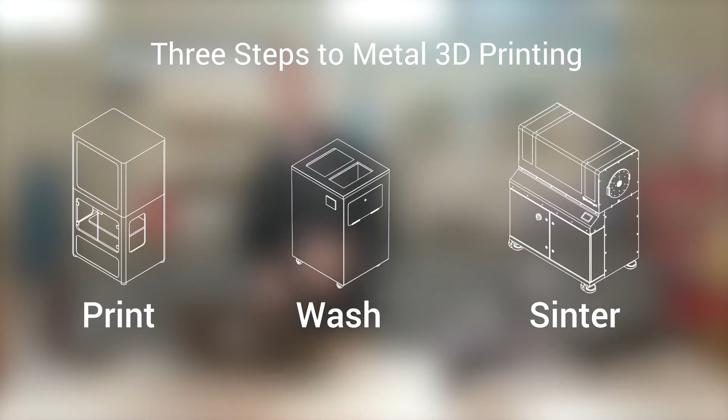First, let's start with CAD. You design your part, then export to STL and upload into Eiger. Eiger is a cloud-based slicing and print management system that comes with every Markforged product. This automatically configures your part based on the material and printer you've selected.

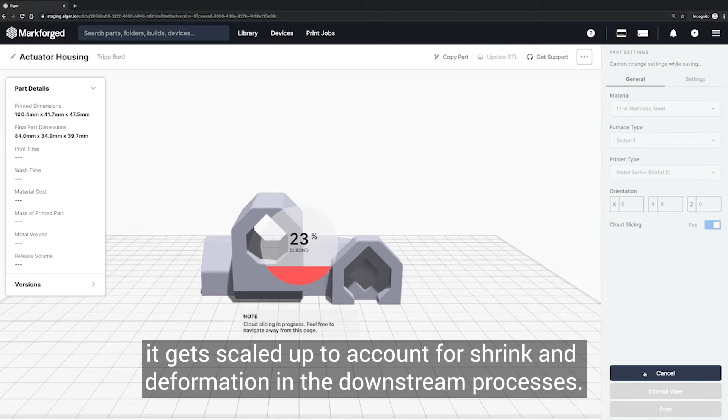When your part slices for metal 3D printing, it gets scaled up to account for shrink and deformation in the downstream processes. It then slices your part into discrete layers, identifies overhang features, and builds supports and a raft underneath your part. As we go through printing, washing, and sintering, Eiger will monitor the part's progress along the way. Let's start this print and go to the Metal X.

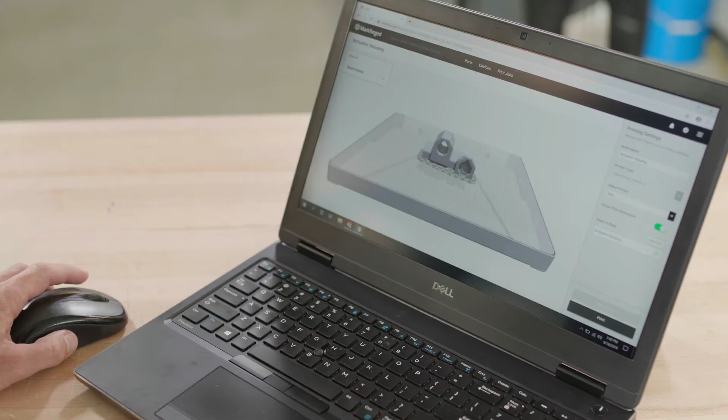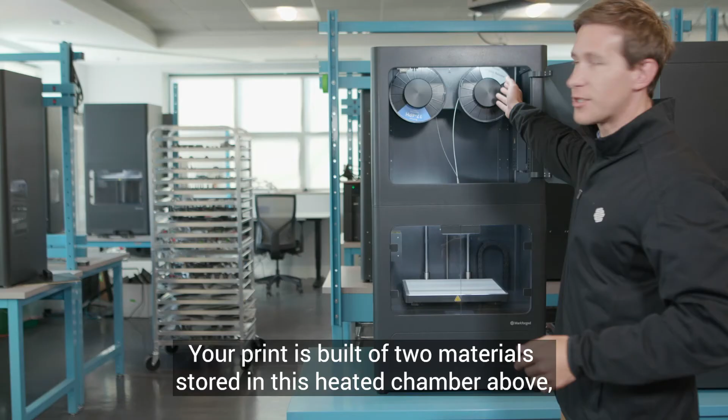Before starting a print, the machine automatically maps and levels the bed to ensure the first layer goes down well. Your print is built of 2 materials stored in this heated chamber above, one of ceramic release material and one of the metal to be printed. This filament material is metal powder safely suspended within a 2-part plastic binder. It gets heated and extruded onto the build plate where the part is created layer by layer.

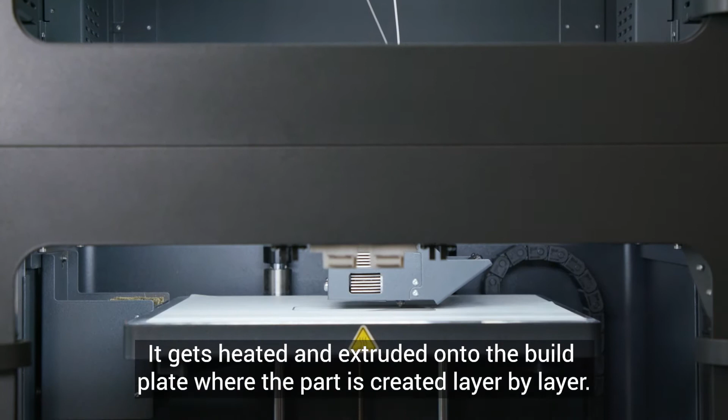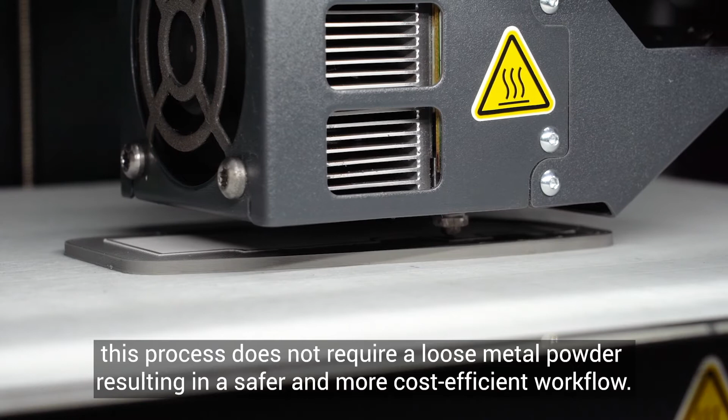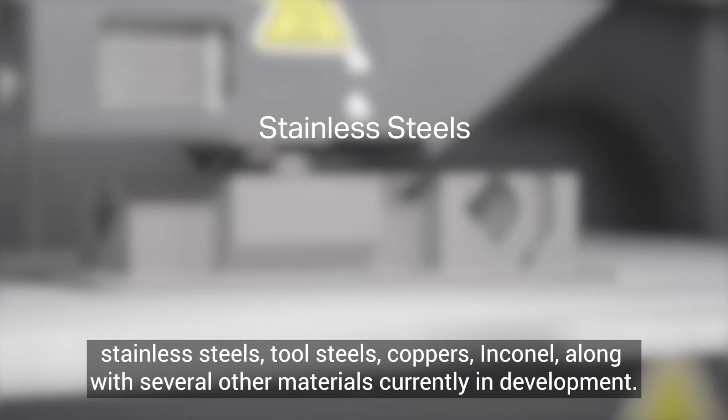The release material gets extruded as an interface between the part and its supports, so that once your part comes out of the furnace, it's easy to remove. Unlike other metal 3D printing systems, this process does not require loose metal powder, resulting in a safer and more cost-efficient workflow. 17-4 stainless steel is loaded now. However, with a quick changeover, the system is capable of printing in stainless steels, tool steels, coppers, Inconel, along with several other materials currently in development.

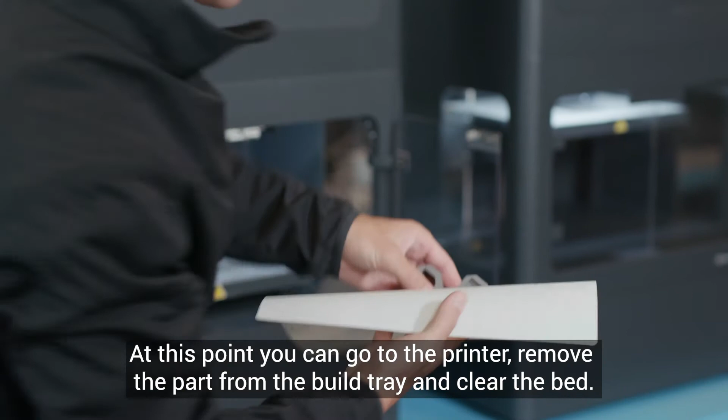Once your part is finished printing, you'll get a notification. At this point, you can go to the printer, remove the part from the build tray, and clear the bed. Now we have what's called a green part. It doesn't really look or feel like metal. However, a large part of it is comprised of metal powder. Next step will be putting it into Wash-1 for the debind process.

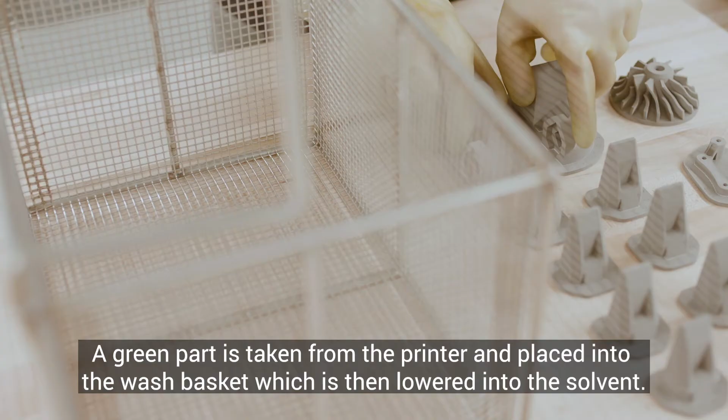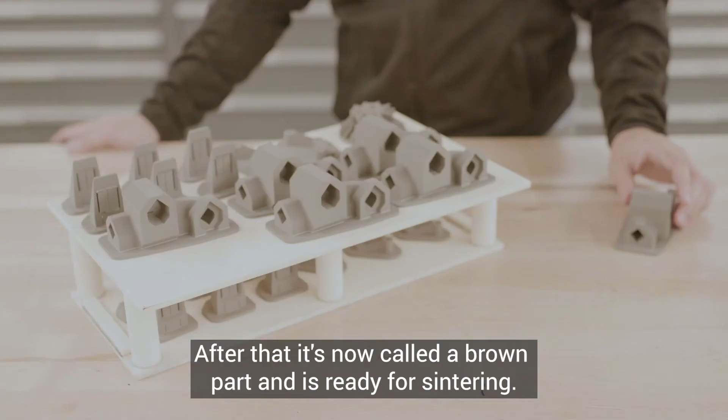The Wash-1 removes the first stage of the binding material. A green part is taken from the printer and placed into the wash basket, which is then lowered into the solvent. Wash times will vary, ranging from a few hours to a few days, depending on the thickest region of your part. After that, it's now called a brown part and is ready for sintering. Let's go over to the furnaces.

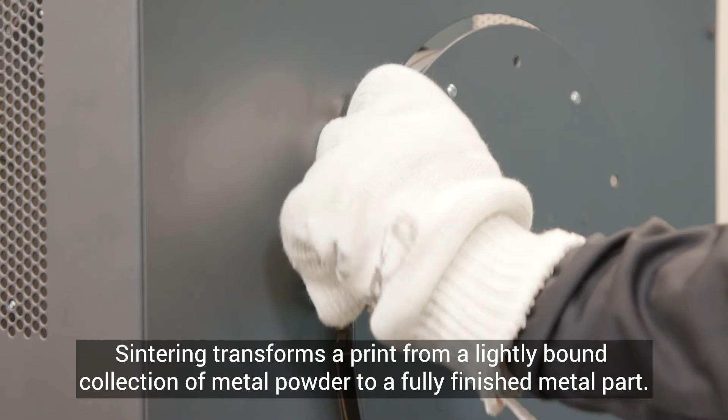This is Sinter-2, a furnace designed for mid-volume production runs and larger printed parts. Sintering transforms a print from a lightly bound collection of metal powder to a fully finished metal part. First, the temperature ramps slowly to burn away the trace amounts of remaining binding material. Then, temperature ramps closer to the melting point of the material, allowing metal particles to start to fuse together to create a strong metal part.

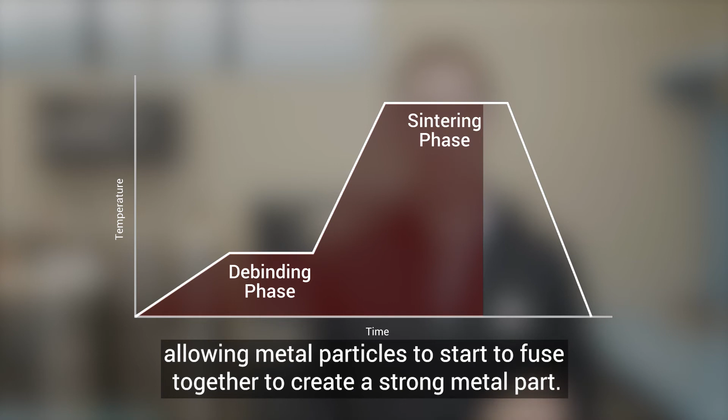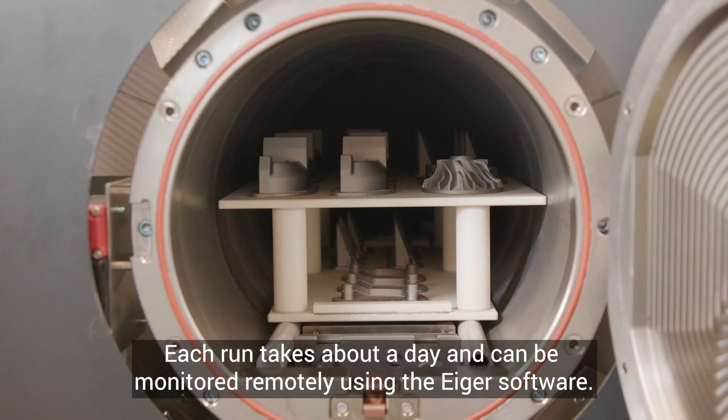Markforged sintering furnaces use a carbon-free retort to ensure part quality and alloy composition standards are met for our finished pieces. Each run takes about a day and can be monitored remotely using the Eiger software. Once a run is complete, the setter tray full of finished metal pieces can be removed from the furnace. Once removed from the raft, these parts are ready for use.

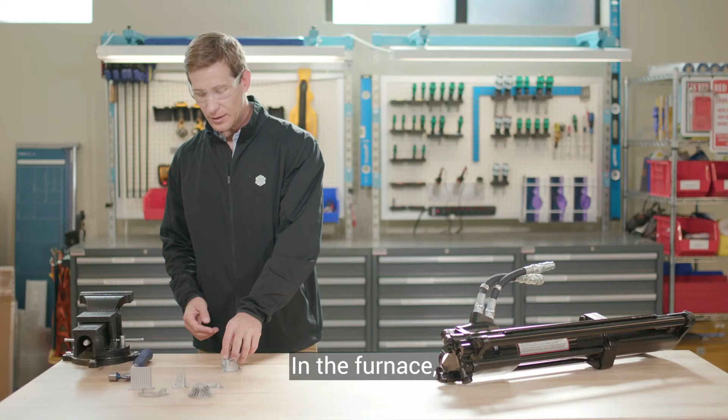In the furnace, the layer of printed release material between supports and the raft and your printed part remains powderized. This allows the structure to be tacked to the raft to better control shrink and accuracy throughout the process, but also an easy release after sintering.

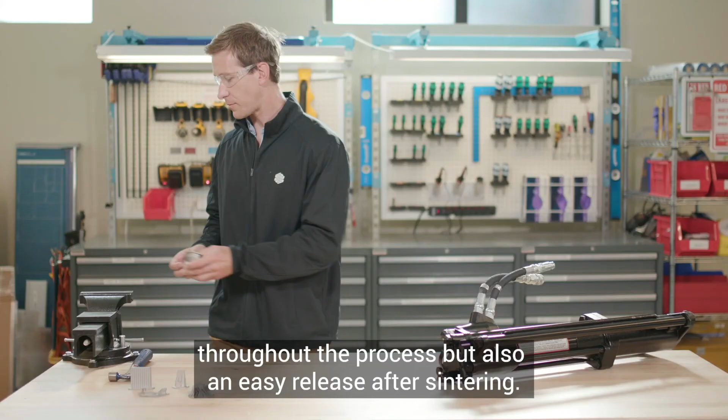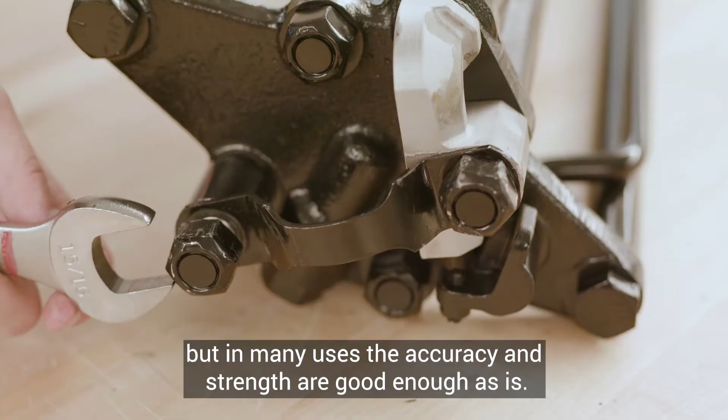At this stage, your part is fully sintered and ready to be used. It can be post-machined, polished, or otherwise processed as necessary for the final application, but in many uses, the accuracy and strength are good enough as is.